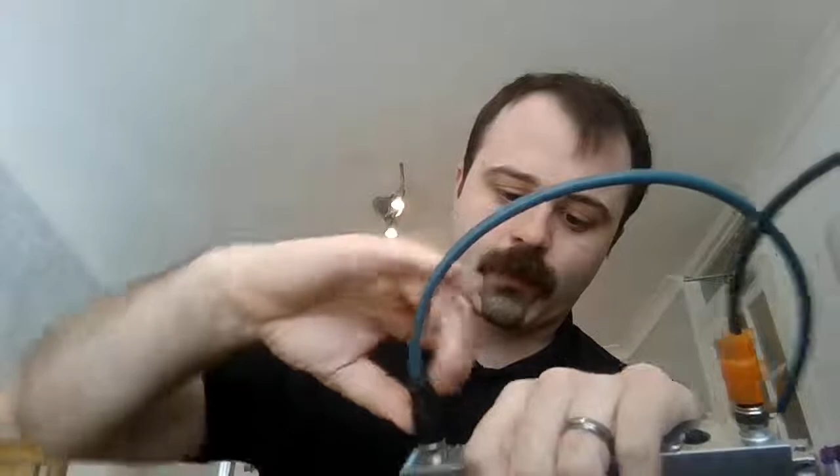So the first thing that we need to do is to set it up by connecting the Ethernet cable. The Ethernet cable that you have to use is one of these ones. At one end you've got an M12 connector, and at the other end you have your standard Ethernet. So I'm just going to plug that in now. It goes into this connection at the top. Okay. Let's get this connected. It's not threading in. There we go.

So that's connected there. I'm going to plug this end into my switch, and then we'll head over to TIA Portal and do the setup. I've reset this device to factory settings, so I'll go through the entire process of adding it to your project, setting the IP address, and then setting up an IO-Link device as well. Let's get started. So we'll plug in the device and switch over to TIA.

Okay, so we're going to jump into TIA now, and we're going to go through the process of setting up this device. The first thing that we're going to need to do is to actually configure this device with an IP address and also a name. Because if we don't do that, then the PLC isn't going to be able to talk to it, and we're going to end up with all sorts of communication errors. So that's what we're going to start with.

You'll see down here on the left-hand side, I've got my online access folder open, and here the PCIe card, which is just my Ethernet connection. And if I update the devices, just to show you what's there, we see I have 2 devices currently connected. I have the PLC, which is an ET200 SP, and this is sitting on the IP address 172.21.0.2. And then we have one thing here listed as an accessible device. This device actually doesn't have a real name and also doesn't have an IP address. It only has a MAC address.

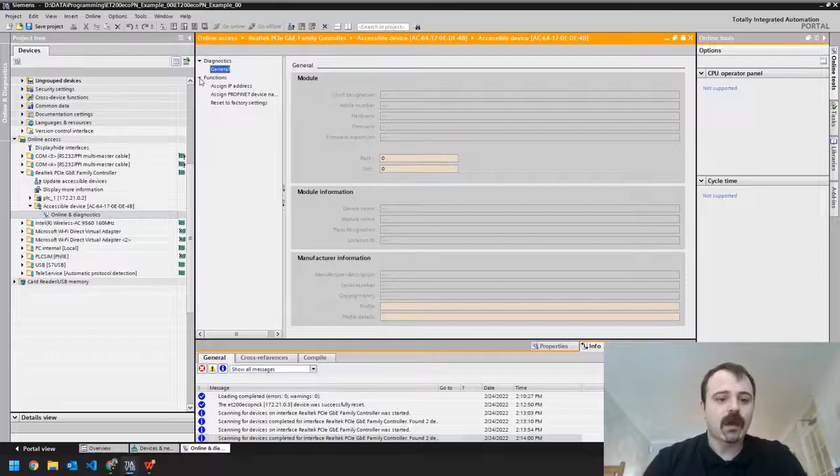So what we're going to need to do is to open the diagnostics for this device. We have here the ability to assign an IP address and to assign a Profinet name. So we're going to do those 2 things now. The first thing I'm going to do is assign it an IP address, and I'm going to assign it in the same range as my PLC. My PLC is 172.21.0.2, so I'll make this one 172.21.0.3, and then the subnet mask has to match.

Once that's done, I'm going to click assign IP address, and that will download a new IP address into the IO-Link master. So that's done, and we should see that update here on the left-hand side, but it still doesn't have a name, and you do have to have both of these things set in order for it to work properly.

So we're going to come to this next tab, Assign Profinet Device Name, and we're going to give it a name. So we could call it something simple. Let's go for IO-Link Master. So that'll be its device name. You could call it something better, but that'll do for now, I think.

And we have to click down here this Assign Name button. So we're going to click that. There we go. And we should see in a moment, it updates over here, IO-Link Master. So we now have a proper name and we have an IP address. Fantastic. So that's the device hardware kind of configured from a networking point of view, but we haven't actually added it to our project yet.

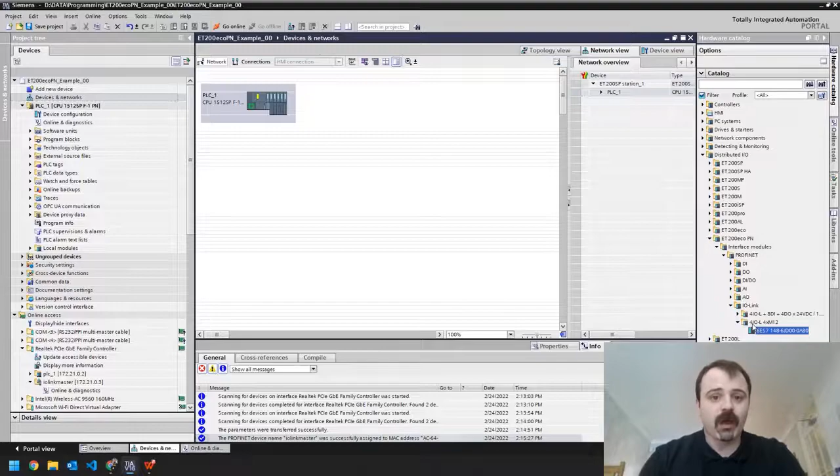So if we go back to our Devices and Networks tab, we have an overview of all of the devices in our project, and we then need to find the device from the hardware catalog on the right-hand side. If you know the exact part number, of course, you could just search for it. Or it's fairly easy to find. This is a distributed I/O device. We know the part name. And it's this device down here, which is a 4x IO-Link master. And we're just going to drag that and drop that into our project.

So we have the IO-Link device, and we have our PLC, but we just need to link the two together. There we go. So now we have a connection between them. You'll remember that the first thing that we did was to set an IP address and set a Profinet name. We need to check that the devices we're referencing in our project match the devices that we have listed down here. So let's first check the PLC. We can open this tab at the bottom, look at the properties, and see, yes, it does have the IP address 172.21.0.2. That's good, it matches the physical PLC.

And let's check the same for the IO-Link device master. If we come up here to the Ethernet addresses, we see there's a problem because this Profinet device, for some reason, has started with this IP address. We need to make sure that it's actually set to number 3 so that it gets the correct IP address when we download from our project and the PLC knows how to talk to it.

The next thing we have to do is just to check the Profinet device name, and you see it's actually allocated one automatically, and I would much rather use the one that we have, so we're going to go for IO-Link master. There we go. So as long as that matches what you put in earlier and your IP address matches what you put in earlier, then we should be pretty much on the right track. So that's the initial device configured, and then our project configured to contain that device.

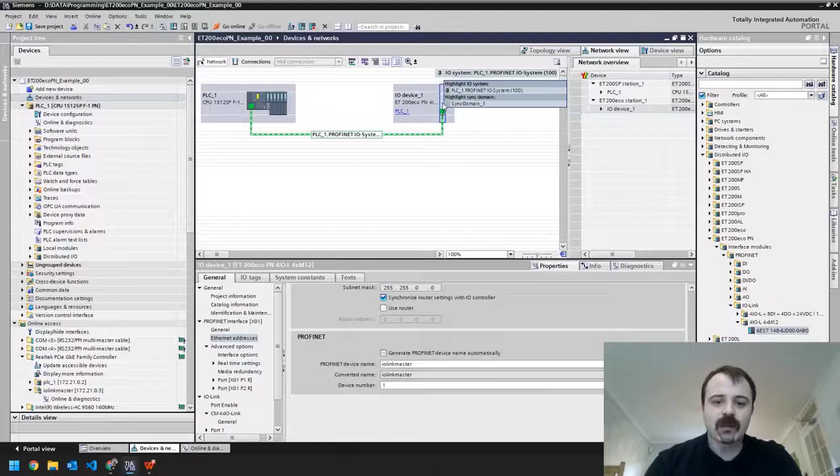Now what we have to do is actually start to think about the IO-Link capabilities here. So what we'll do is we'll just jump into looking at this device in a bit more detail. We actually have the same properties down here as we had before, but it's nicer to focus in on the device. So this device is kind of clever. It has 4 ports available on it. You can see them on the front here, 1, 2, 3, 4.

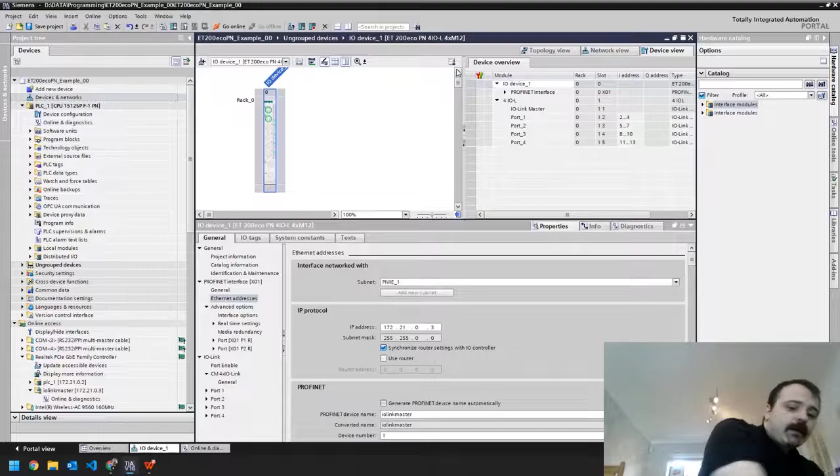But these ports can either be IO-Link ports, or they can just be standard digital inputs and outputs. And so we have to describe what we want them to be. Do we want them to be IO-Link ports? Do we want them to be digital ports? Or do we just want to disable them completely? So let's have a look at our options here. We have here the IO-Link properties, and we've got the 4 ports, we can say we want to enable or disable these different ports.

What I'm going to choose to do is to disable any of the ports that I know that I'm not going to use. So I'm only going to use 1 port here, just the first one. If I had more IO-Link devices, of course, I could enable more of them and configure them all separately, but for the purpose of this tutorial, we only need 1 port.

So because only 1 port is available, we can see the configuration for it here, port 1. We could change its name and comment for what it's going to do, but we'll leave all of that for the moment. The only thing that's really going to be important here is setting the port type. So I said we can have it as a digital input or a digital output or any of these IO-Link device options. And so what we're looking at here is the amount of address space that this IO-Link port is going to take up. Now, why might you want to change that?

Let's say you have something like a really simple sensor. Maybe just a height sensor, for example, analog height sensor. That's probably only going to take up 1 input byte worth of data. So you could come here and you could say, okay, I only need a single input byte. It only needs to take up 1 byte worth of space.

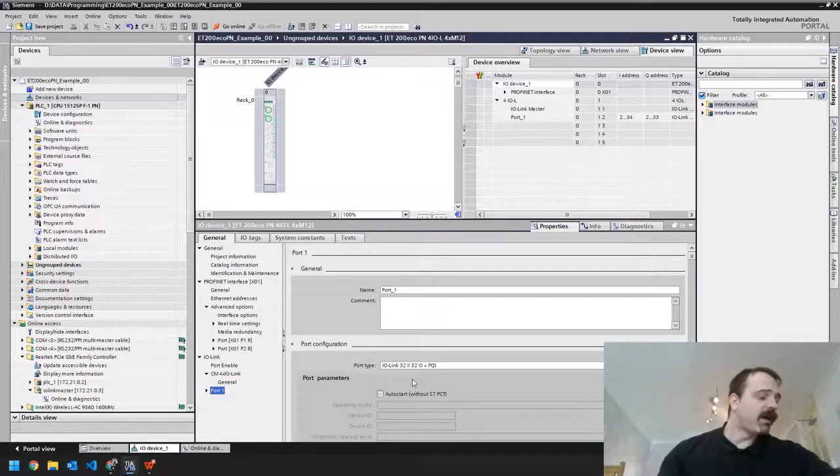The device that I'm using, just for this demo, is this small device here, which is a miniature HMI. It's got a couple of buttons and a little screen attached to it, so it's quite a complicated IO-Link device. So what we're going to do is we're going to say we need more space. So I'm just going to give it 32 bytes of input and 32 bytes of output space. I actually don't know how many this screen needs. I think it probably needs only 16 of each, but it doesn't hurt to have more available.

So because I've decided here that there are 32 bytes of input and 32 bytes of output available, up here we see where that is actually addressed to. And so it's 32 bytes input and output starting on 2. Now, I don't really like my IO-Link devices to start on 2. I think it's kind of confusing if you've got your inputs and outputs on 0 and 1, and maybe you've got 16 inputs and 16 outputs. It's all a bit too close. So I'm just going to change my IO-Link device to start on 100. Just gives a bit of space, bit of freedom, and a nice big round number.

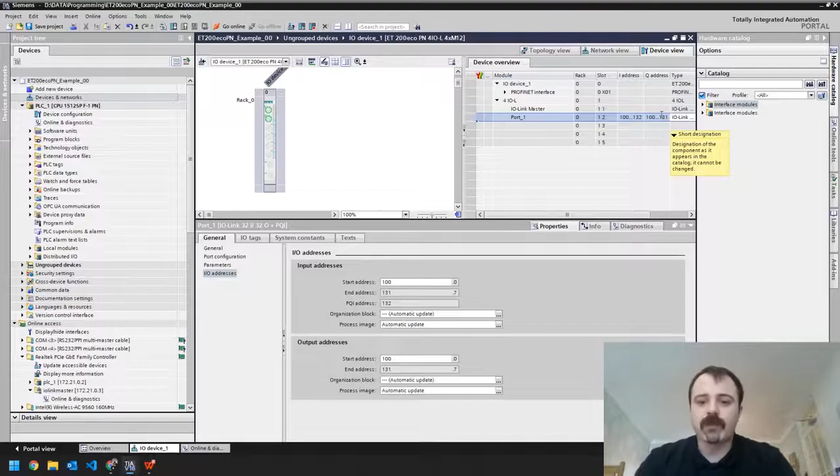Can't go wrong there. So we have now set up the IO-Link master device to give it a single port with 32 bytes worth of input space and 32 bytes worth of output space. We've addressed it to a nice known location. We have made a lot of changes to this project since we started, so it's time to download this and check everything works. So I'm going to do a couple of things here. I'm not entirely sure that they're all strictly necessary, but I like to do it just because I'm really confident then that I'm happy.

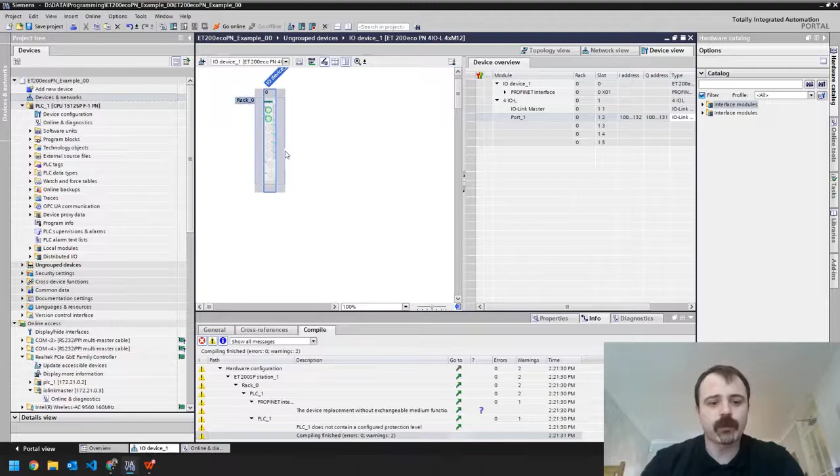I'm going to right click on the IO-Link master and I'm going to choose compile the hardware and I'm going to get it to rebuild all. So this is kind of important because any changes that you make here to the ports, the amount of address space that they require, or which ports are enabled and disabled, anything you do like that is kind of a hardware change. So it's a really good idea to compile those hardware and rebuild it all.

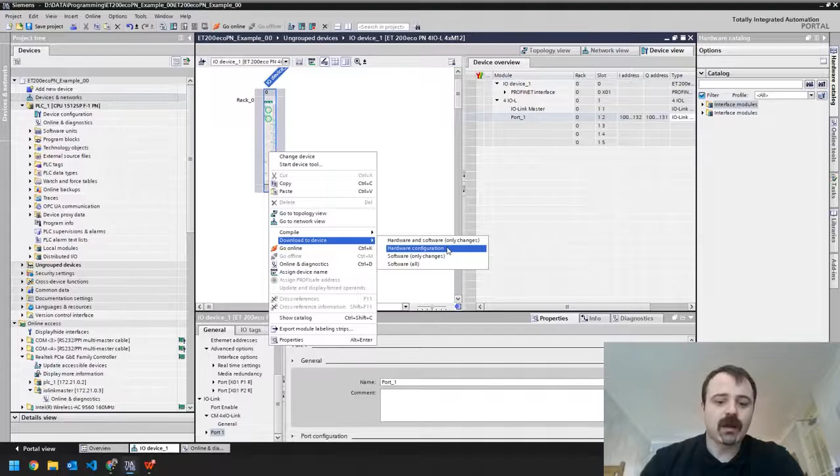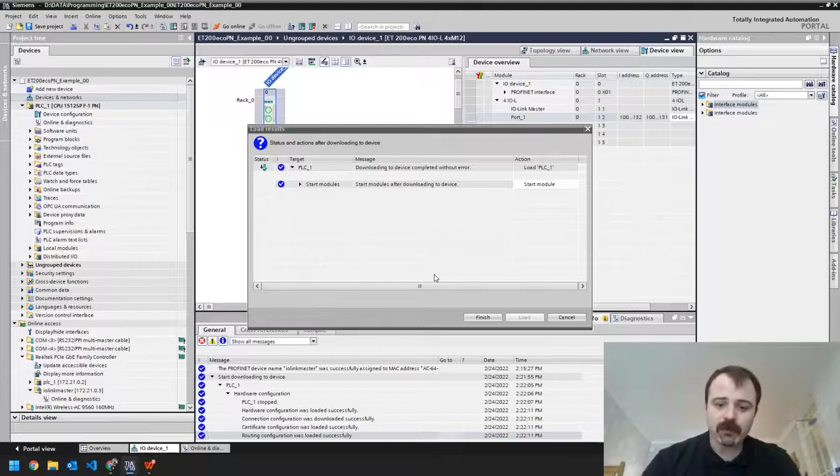And then I'm going to download to device, and I'm going to say I want to download the hardware configuration. It's going to ask me to search for my PLC, so we'll just do that. And then we will download. Now this process could take anywhere from 10 seconds to a minute, just depends. There we go, TIA was really quick this time, but that download worked. And now what I'm going to do is I'm going to make sure that I actually download the PLC program as well.

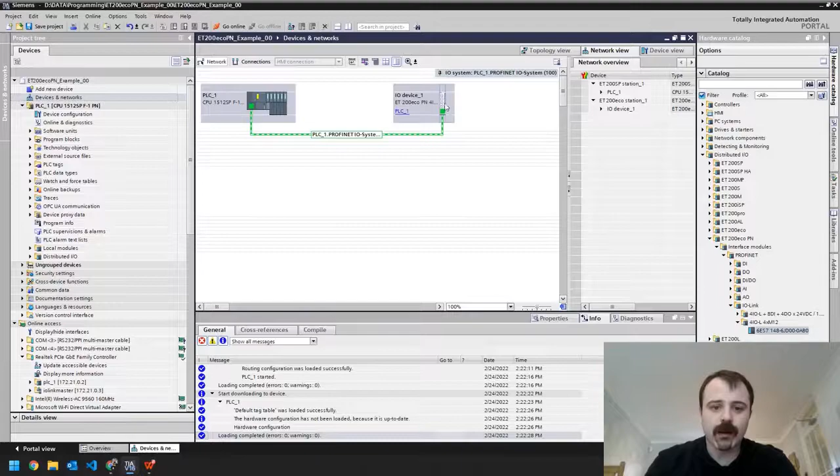Okay, so it looks to me here like everything might be downloaded and talking correctly and hunky-dory. So what we're going to do is we're going to right click on our device again and choose Start Device Tool. And we're going to open a program called S7PCT. So this is actually no longer inside TIA Portal. It's a separate piece of software. It will install automatically with TIA Portal, so it should be already installed for you to use if you're using TIA.

The project opens and we see on the top here I have my IO-Link device being listed. And so all I'm going to try and do at this stage is just simply connect to it. And if I've done the hardware setup correctly, at this point it should go online. Great. We see online success. That means that the communication is working between our PLC and our IO-Link device. Everything is set up correctly. This is really fantastic, good news.

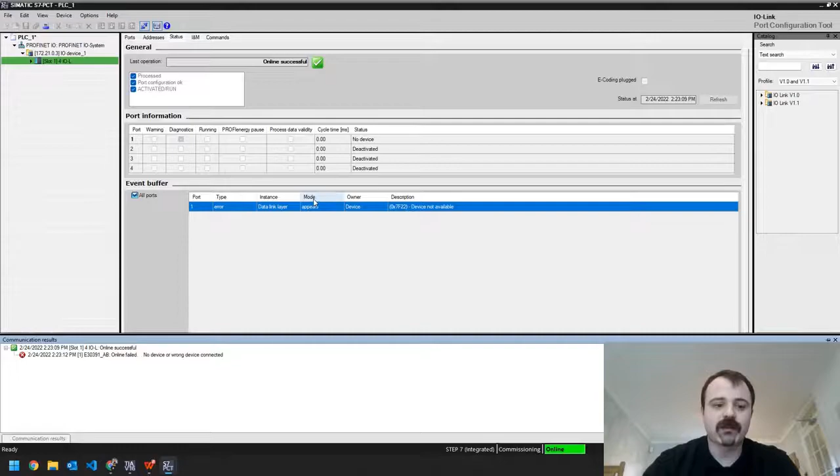We have one error message being displayed here, which is just that the device is not available. But what this is actually saying is that the IO-Link device is not configured correctly yet. And that just means that I have actually already in this project set up this IO-Link HMI, and it's not connected because I haven't wired it in. It's sitting here, not yet wired in. So if I wanted to, if we just go offline, I could delete that IO-Link device and we could add it fresh from the menu.

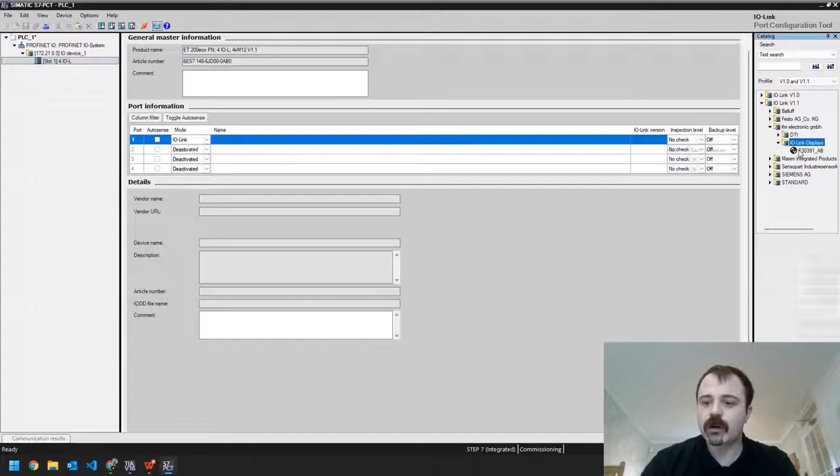Now I'm not going to go through all of this. There are other tutorials that take you through adding and configuring IO-Link devices. I'm just going to wire that one in there and then I'm going to actually screw in the device into the master. Okay, so IO-Link device is now connected. I'm just going to choose the download button here. And hopefully it should now download that configuration that we've described nicely into my IO-Link master, which means that this should now work and be connected over Profinet.

So that's really everything in terms of the tutorial to show you how to connect this device. I'm not going to go through any more changes that need to be made to this device. Everything should now work. What I will do for the next minute of the tutorial or so is just go about proving that this is connected by reading some of the input bits. But that's not relevant for just setting up the device. So if that was all you were interested in, consider that the end of the tutorial. But if you want to watch on for just 30 seconds or so, then we should get to a point where I can push these buttons in a watch table and see this data changing. So let's have a little look at that.

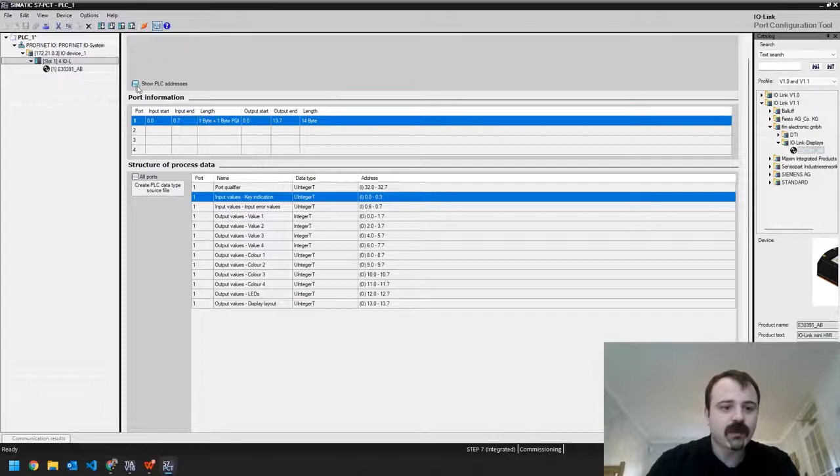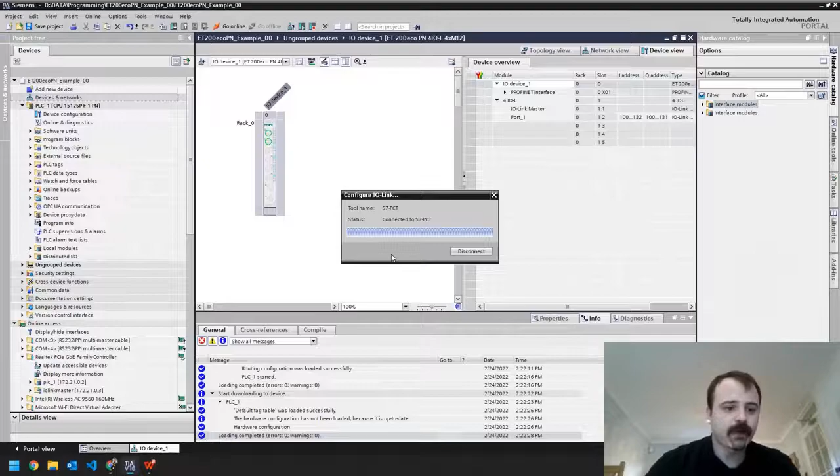So this device says that it's got some key indication, and that the key indication, that's these little buttons, should exist on input byte 100 because that's where I set up 100, right? That's the starting point. So let's just close this PCT tool. Yes, I want to save as I close it. Just make sure that the configuration is saved to the project. And I'm going to go to my PLC's watch table, let's add a new watch table. And let's look at IB 100. Oh, not 0, IB 100. And let's look at it in decimal format and let's just monitor this.

Then we should see, I hope, as I begin to push these buttons, there we go. We see that the actual display value changes there. Depending on the buttons I push, I get a different monitor value back. So that just proves that the connection is working. I'm getting data from my IO-Link device via my IO-Link master back into my PLC.